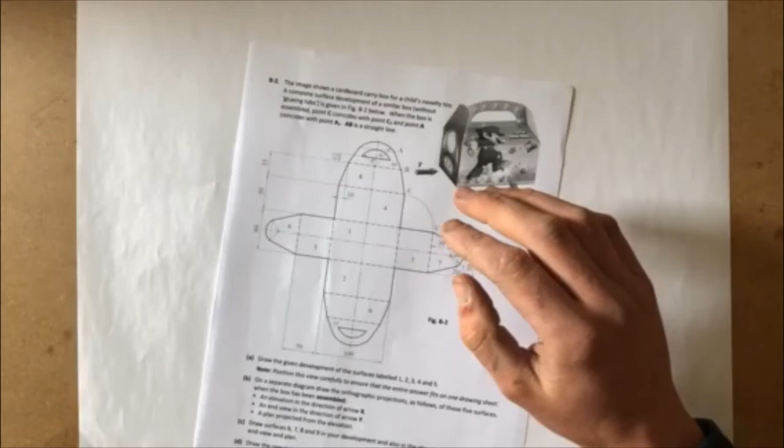So we're going to keep this. We said you'll have a big drawing sheet in the exam. I'm hoping I should be able to fit it onto this A3 sheet here in front of me. We'll see how we go. I'm going to position it over to the left hand side to keep it away, because by looks we have to draw another bit over to the right. So I'm going to keep this point here as close to the left hand side as possible.

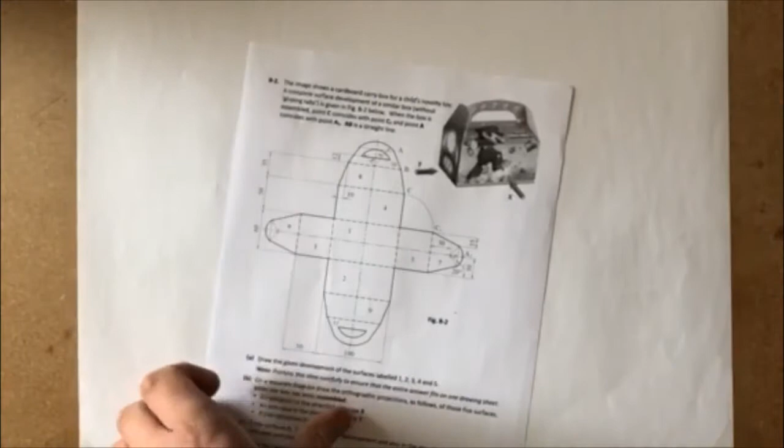Going to start with this corner here. That distance there is 50, so that should be 50. I'm going to leave about 60 mil from the edge of the sheet, maybe 70. Should give me enough space to start.

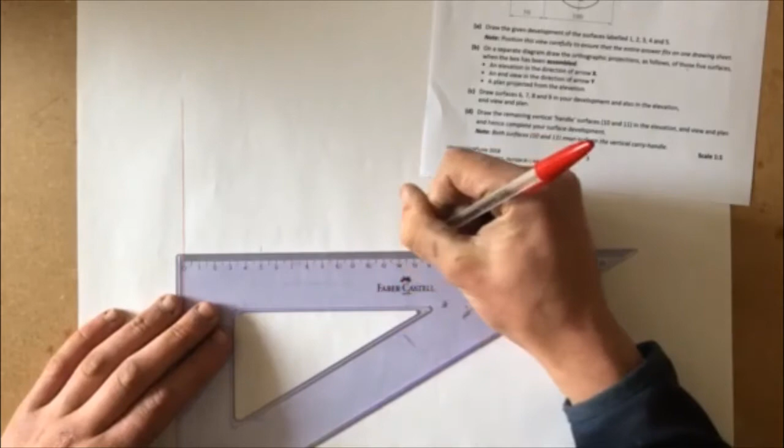Then it's 50, 100, and 50 again. Yes, I might struggle to fit this on now. So in the middle of that there we have a centre line.

And then from the top then we'll try and keep it roughly in the middle, so that's about here, that's the centre over there set.

In the centre I'm going up 30, 50, and 35. And coming down the way then it's 30, 50 and 35.

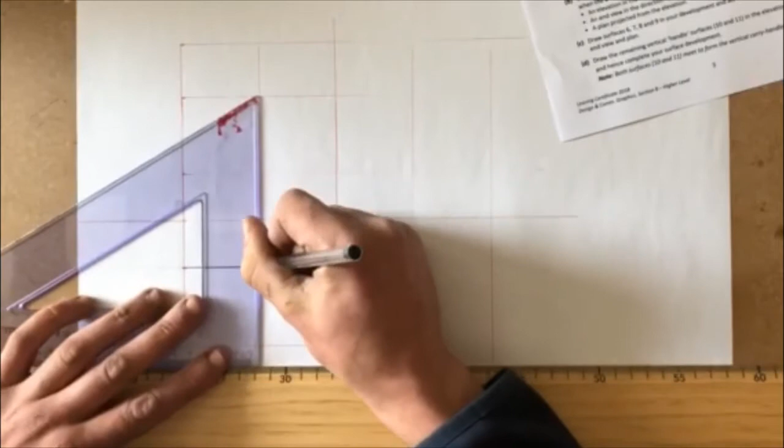So we've got the outline drawn in there now. We'll just go back and heavy in as much of this as we can here. Here's the heavy edge. Look at the heavy edge.

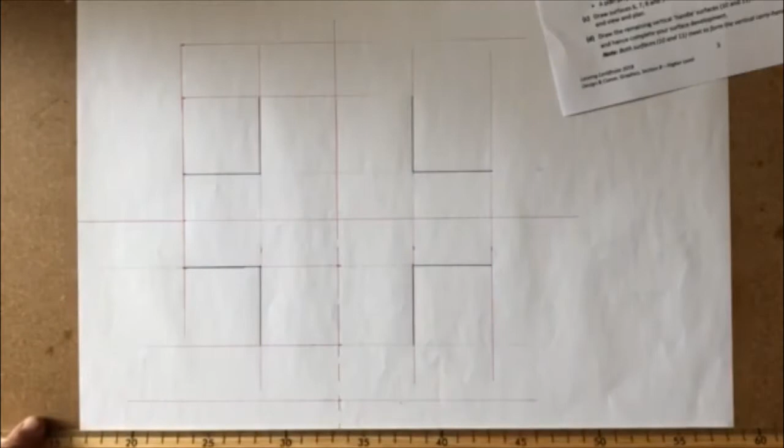Yeah, so that's those edges there then set. We're coming in 10 mil on the edge here to get this 35 line.

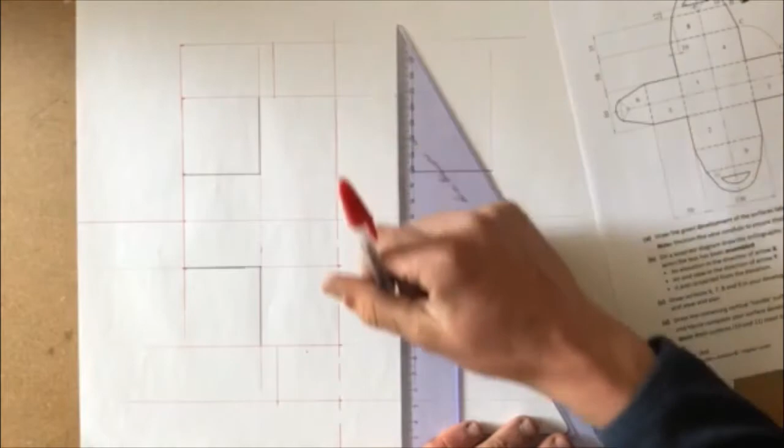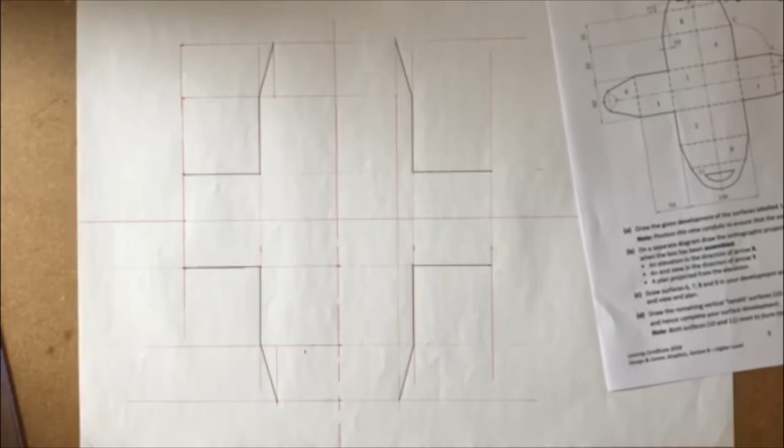Same on the other side. I'll finish this side over here as well. Finish this up. So we see the center is out 30 mil.

Come down 15, up 15. No, just looking at there now, that's a 20-degree angle there. And this one's out 15, so these are actually different.

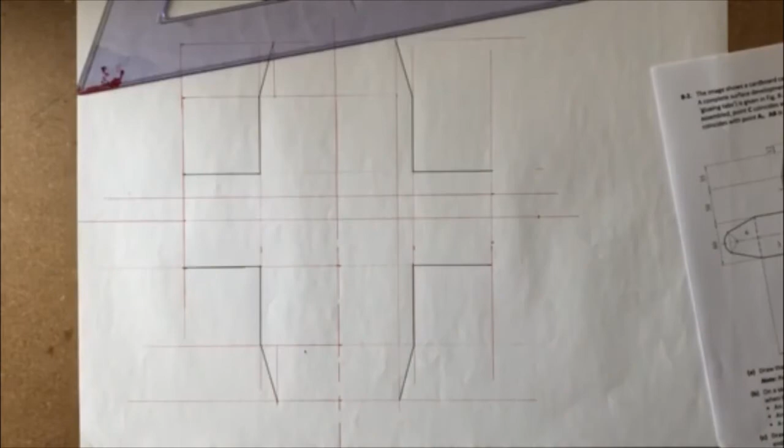So we get caught there very easy now. Where's me protractor? I have a protractor there somewhere.

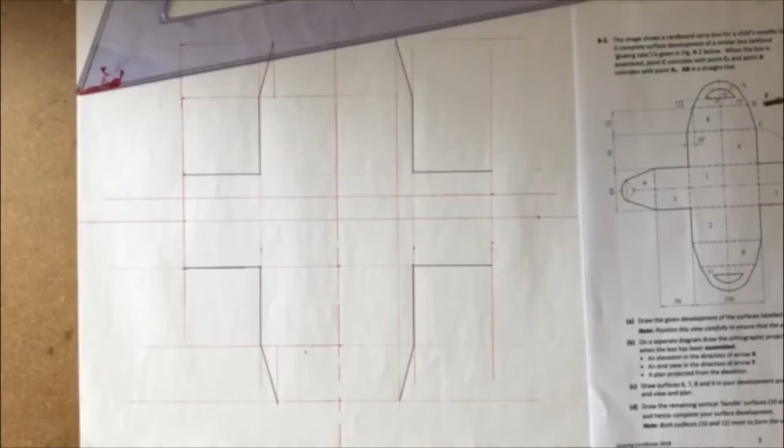Hang on. Don't worry, I'm leaving the protractor now. So I just have to figure it out.

That's 20-degree angle, that's 20-degree angle. That's so symmetrical there. That is 20 as well.

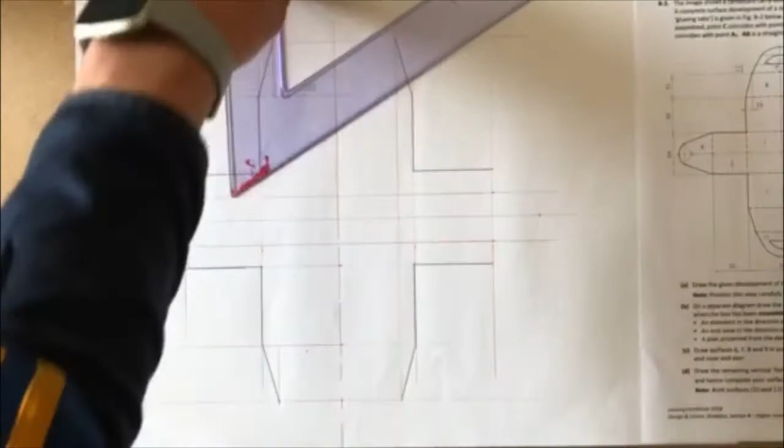Where's this side? Where's that protractor? How do you do it now unless I make it? So I just make it 20 degrees here. We know, because I don't have the protractor. Just end up making it, no, I'd probably make it a bit small then.

And I'll pause this, let's see if I find it. Right, so I'm just looking here now, trying to see what we have here. Trying to draw this surface here.

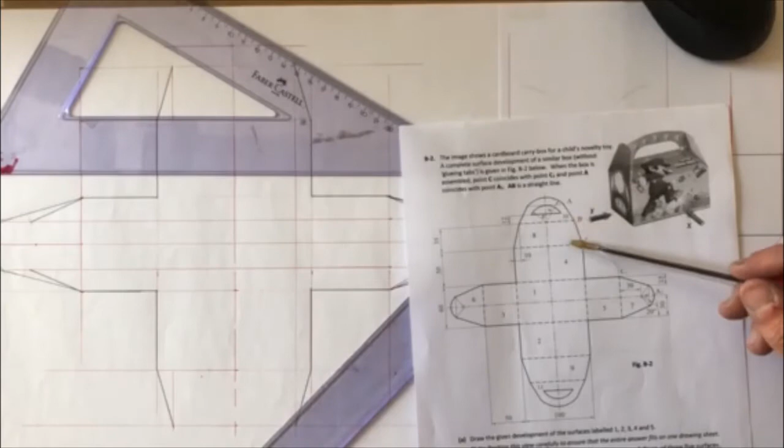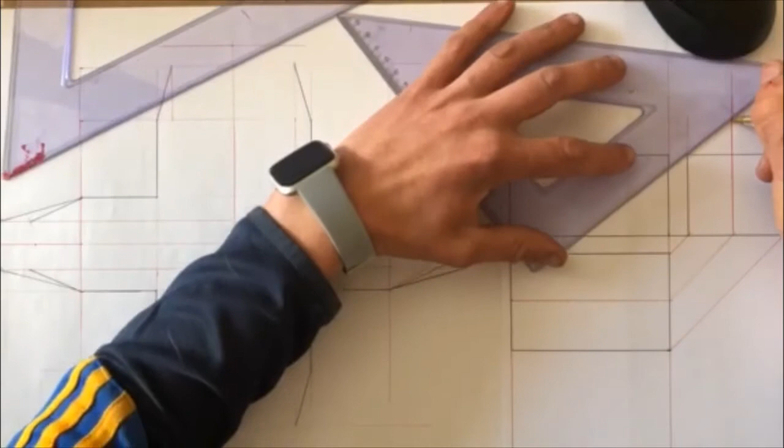So when I'm looking at the end of that, that's going to be folded up and it's going to be folded in onto the centre line. The height's at 35, so it's going to be folded in here somewhere. It's a length 35, so if I swing my compass there, 35, there, 35, yeah, they cross there. Okay, so this will join back there,

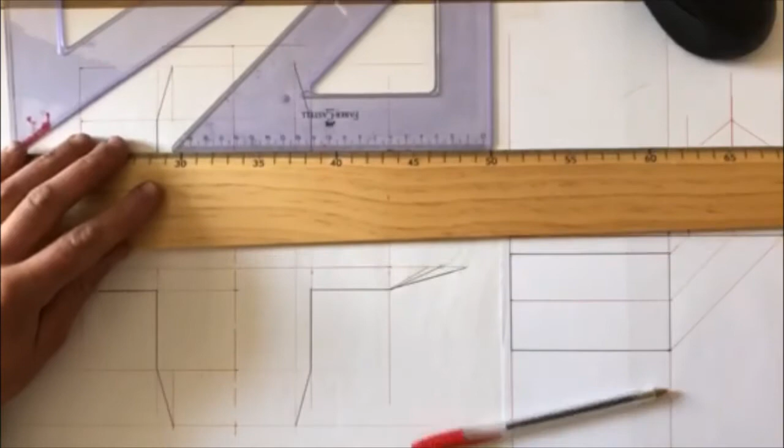And then I need to find that point in plan. So that's falling in plan. Where is that? And that's falling in. Where is E in plan? So it's down here and across.

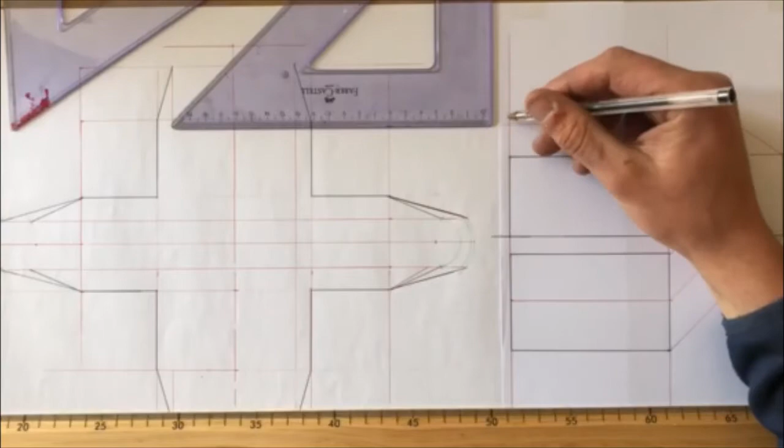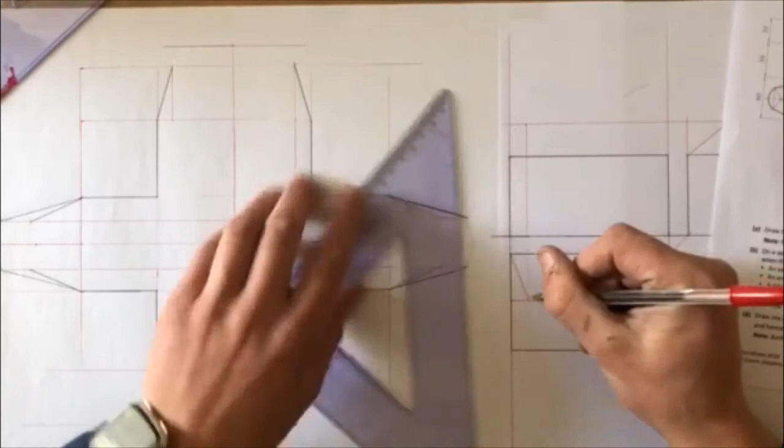It's in 10 mil from the edge, isn't it? It is, because the widths will never change, so it comes in 10 mil from the edge there. So that's that point in plan there. So it's that on that side, it's going to be the same on this side.

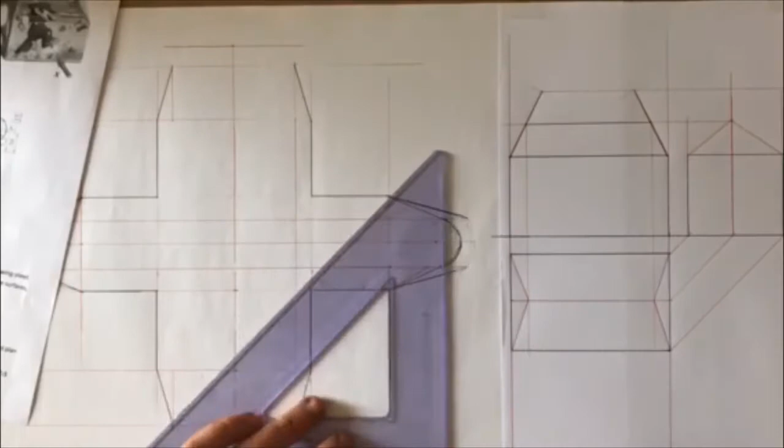Okay, and that's going to come across there then. Now, what we need to do here is just freehand in this curve here. Okay, we need to get some points on that, so I'm going to take just 2 points on it. There and there. And I am going to take the height there up. I'm going to step them off up here. Okay, so that point there and that point there is that height.

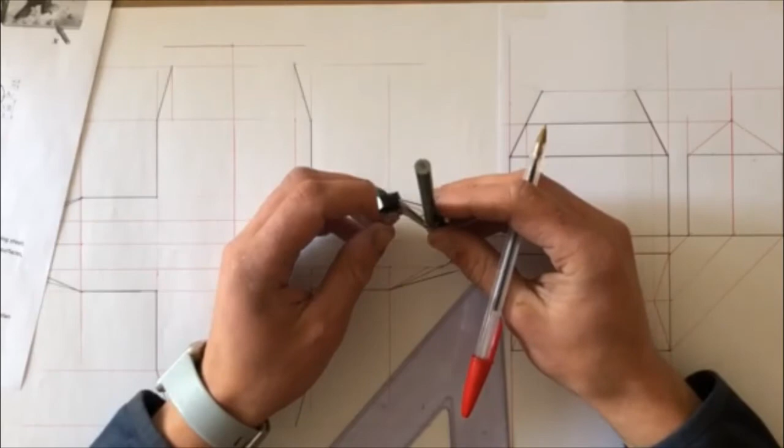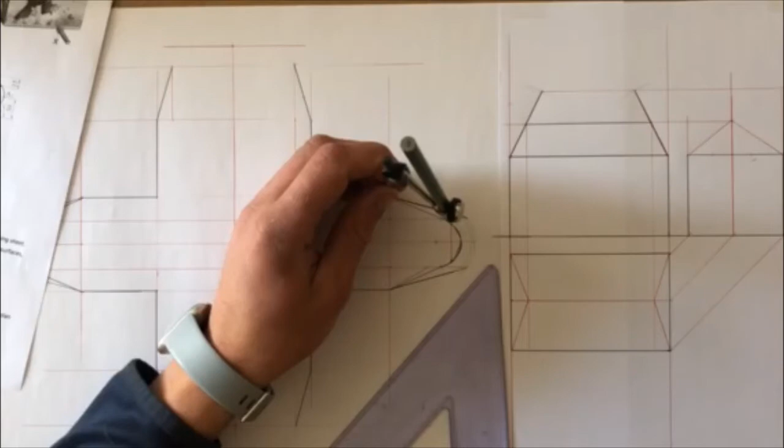I'm going to take the width of them. I'm going to step the width off this way and the width off this way. Sorry, I'm taking the point on... yeah, that's that right there, that distance there is that distance there. Yeah, that's right. So I'm taking that height. Yeah, no, that's perfect. So I'm taking that height there and I'm going to bring it across.

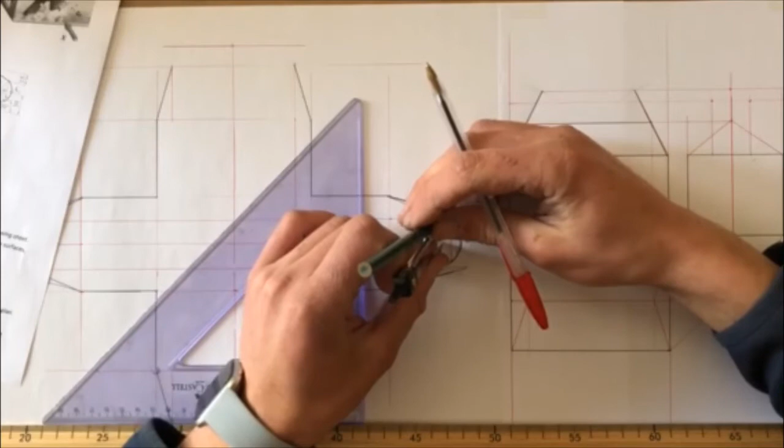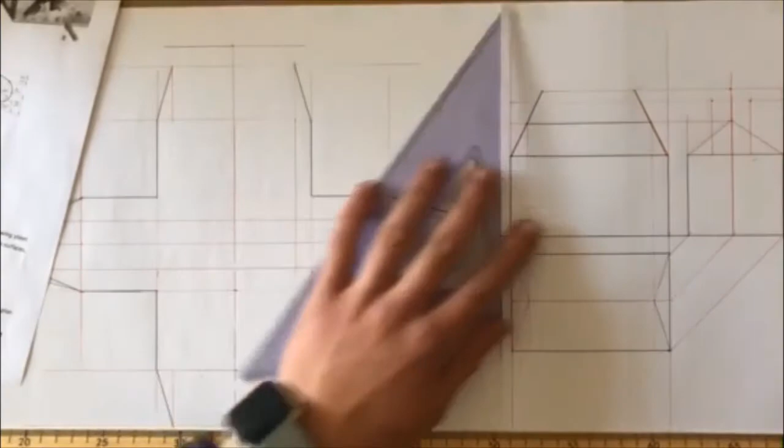I'm going to bring it up there and there. So that's 1 point there, that's 2 points there, that's 3 points on my curve. This is my 4th one, this is my 5th one, which are my widths that I already have. There's that compass gone again. From there to there. Bring these up. Take those heights. That's the wrong height I stepped off there now.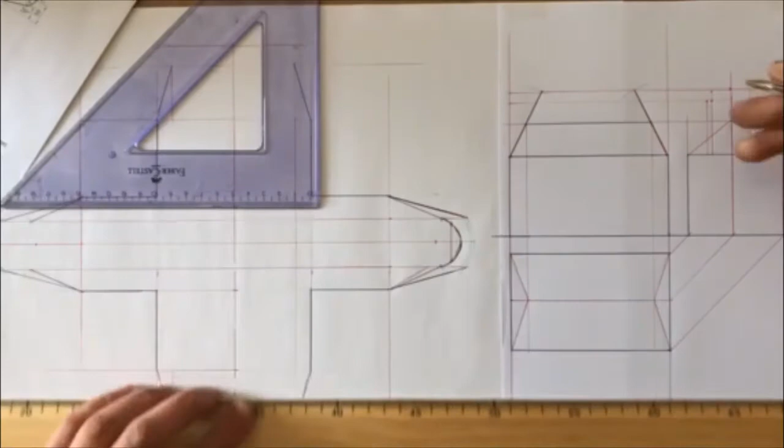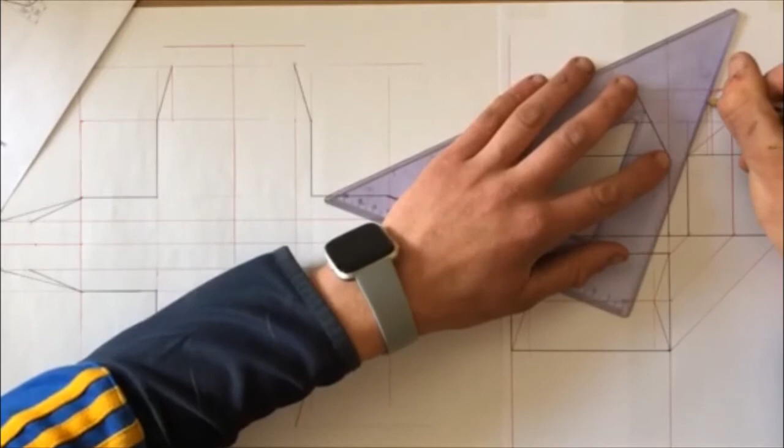That's one there. That's one there. That's one there. And that's one there. And they join those guys curved up there. Create a curve. And come back down to the edge. Heavy that in, pen. Okay, so we're working backwards from what we'd normally do. Normally we divide up this and we bring it down. This time we're dividing it up down here and bringing it up here. Okay, and that's my end view completed then.

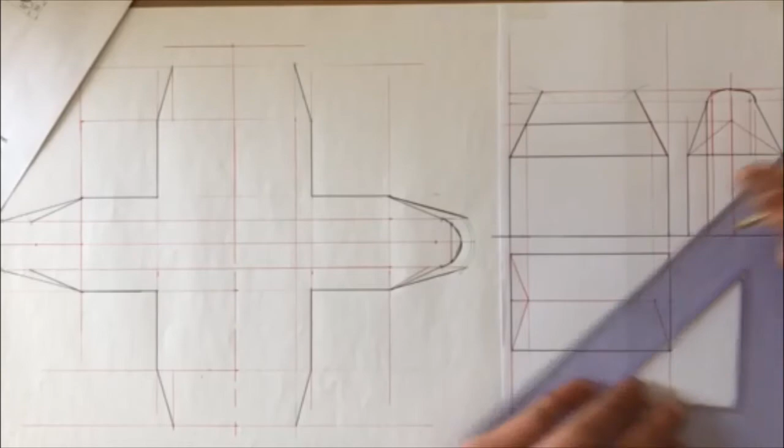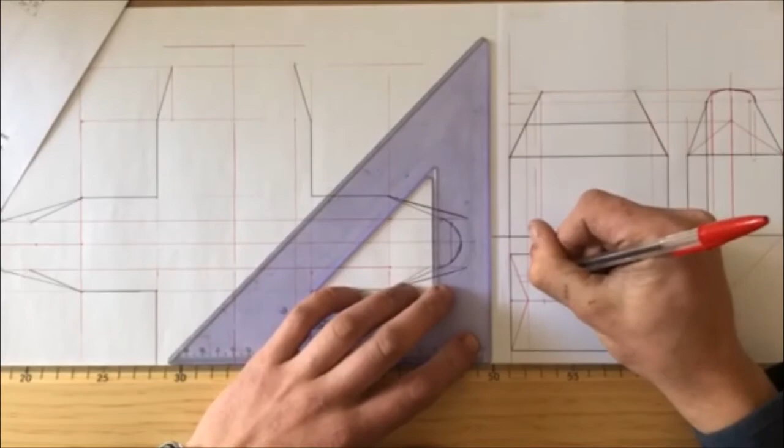We can take those points then again. This one here. Sorry, light pen. This one here, this one here. Bring them down here, here. Bring them in, 1, 2. And drop them down then in elevation here, up here. 1, this in the middle. 2. That's the edge there. That's that one. That's that one. And that goes back down there.

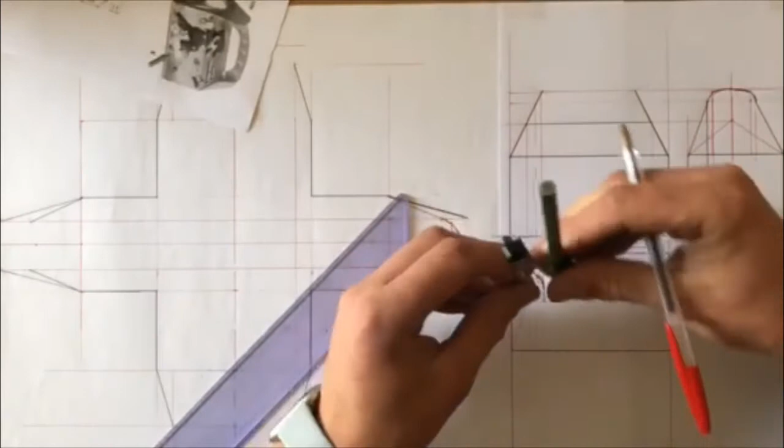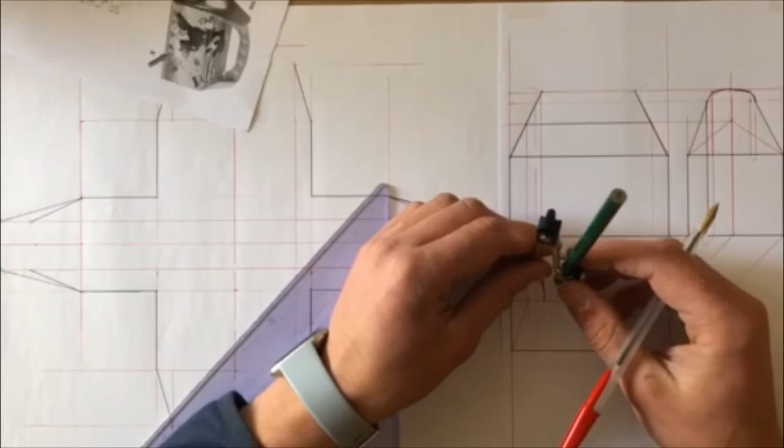Okay, and you can just transfer those distances across then through axial symmetry. This one here across, and this one here across. Down and in there like that. Okay, they're the same on the other side. You can just draw them in on the other side there. I'll do them quickly here.

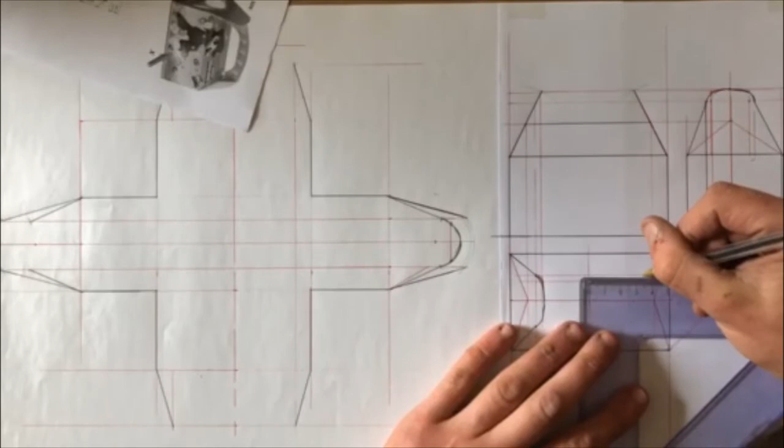So this is 100. Split that there. Split down the middle, 50 easy. Last distance there is 29. 29. There's 27. 27. 34. 34. And that's that for the end view across there then.

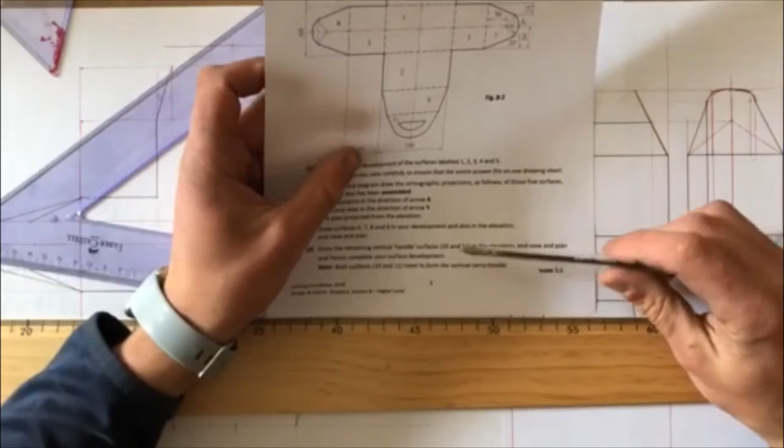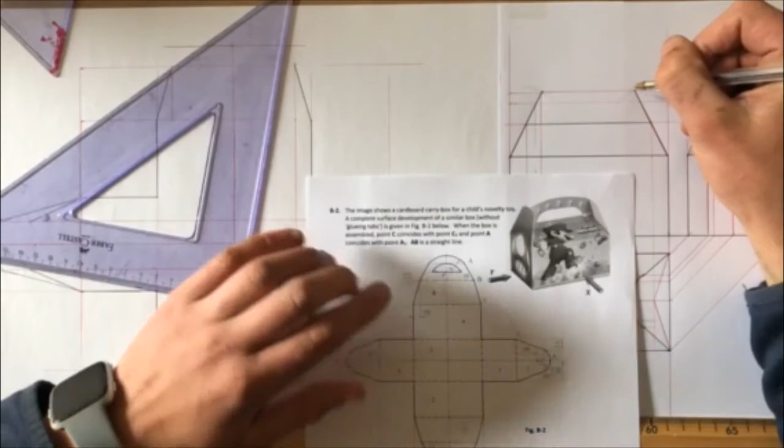Okay, the last bit then in the elevation is this is a flat bit here. The last part here then is draw the remaining vertical surfaces 10 and 11 in elevation, end view and plan, and hence complete the surface development. So basically once we have these heights here now, we have this height here and this height here, we have a curve on top there, so we can split that. So this is my 35 height there.

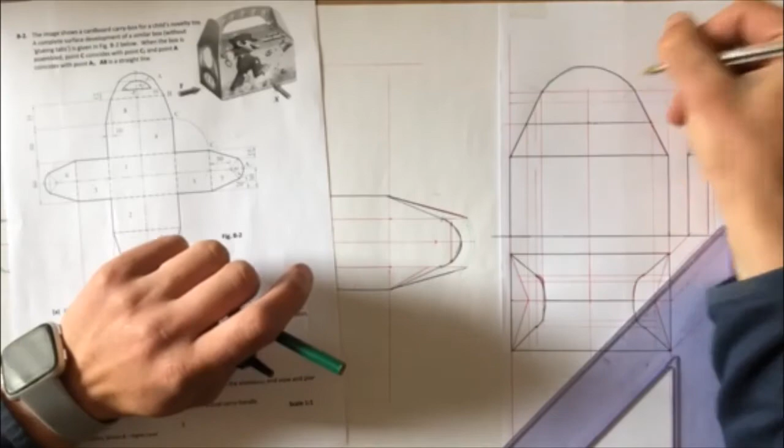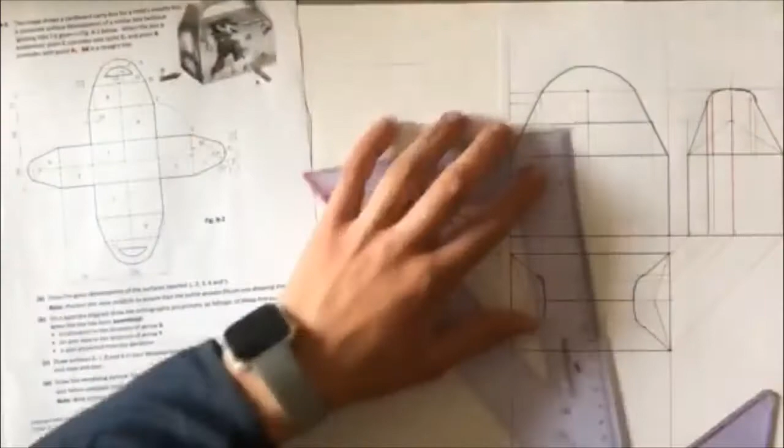So I need a center that runs up to the center of that. I'll bring up the center line from the bottom. Up the center of the bottom there. From there, that gives me my center for this line across the top. Okay, and then that gives me the top point then on my other circle, which is 12 mil up. Just 12 mil up from the base, so if I come up 1, 2, 12 mil there.

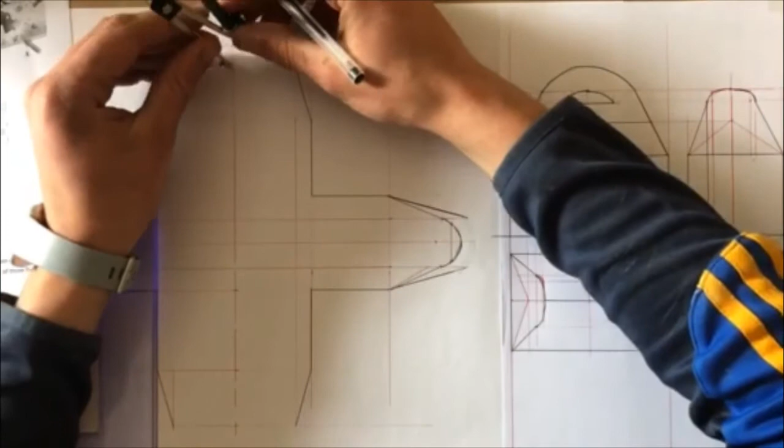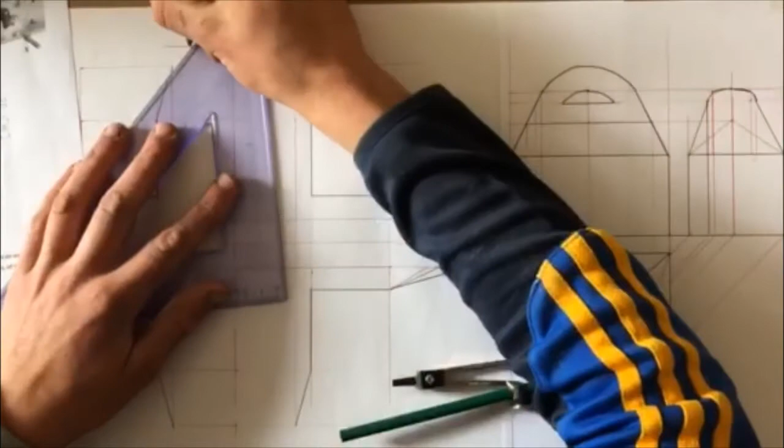Draw a horizontal line. And that's the curve there. That then gives me my radiuses for my curve over this on the far side. And the same here, this radius here. Into me here, and then like that. That's my 12 up. Yeah. And then they just join back to the edge there like that.

Okay, same down the bottom here, and then just fill in your dashed lines here, here, and here, here, and here, here, and here, and then that's that one done. Okay, tricky enough one now that is. There's a bit of time and a bit of visualization in it. So give it a go. If you have any questions, let me know and see how we go.

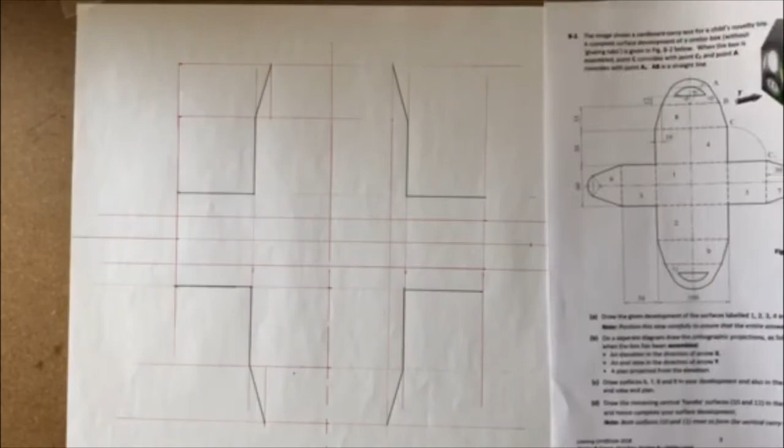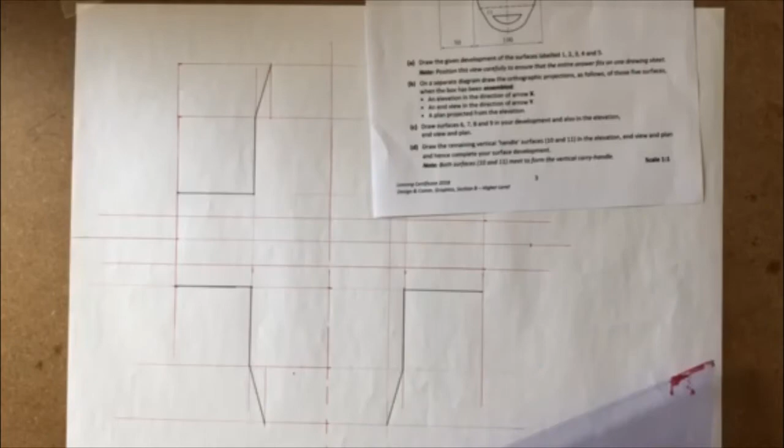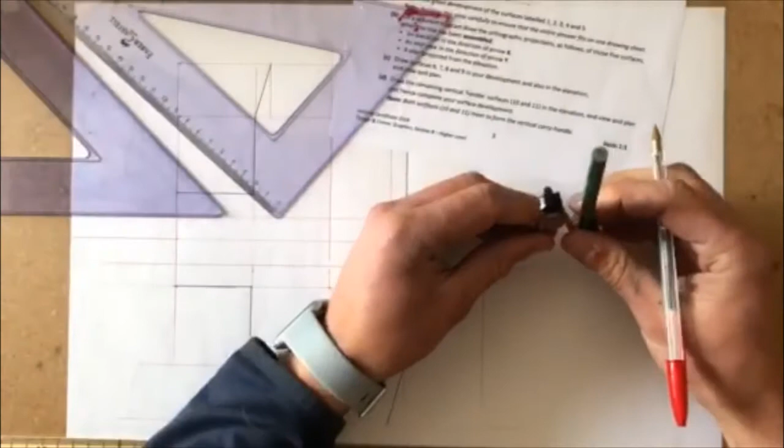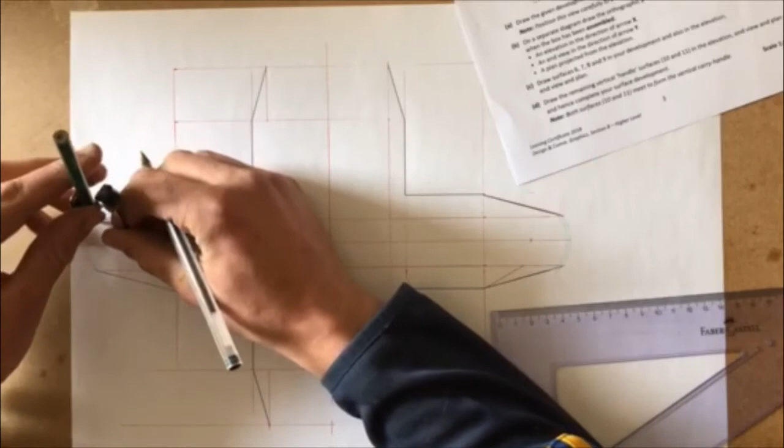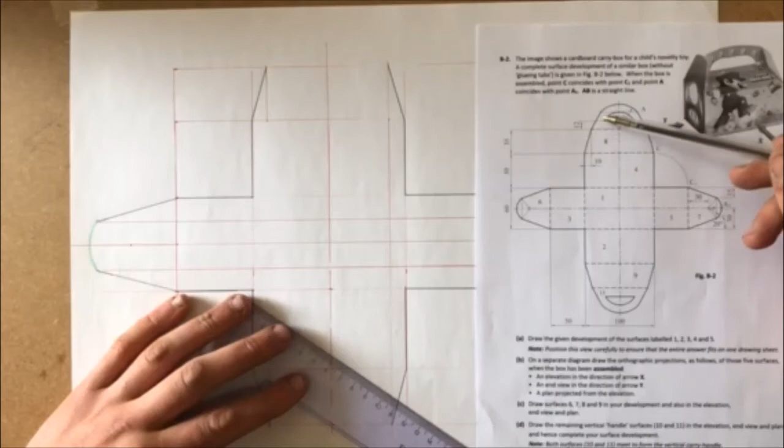Okay, that's that side then done. Here then, the top here, we're going 100 wide, yeah. That's up to the edge now, we need to do this bit up the top here. It's up 12 mil anyway. Up 12 mil.

Radius of one gives us the radius of the other one. Now they have R, and R. I wonder, are they all the same? No, they're not. Look, I need to draw 1, 2, 3, 4, and 5 to start with.

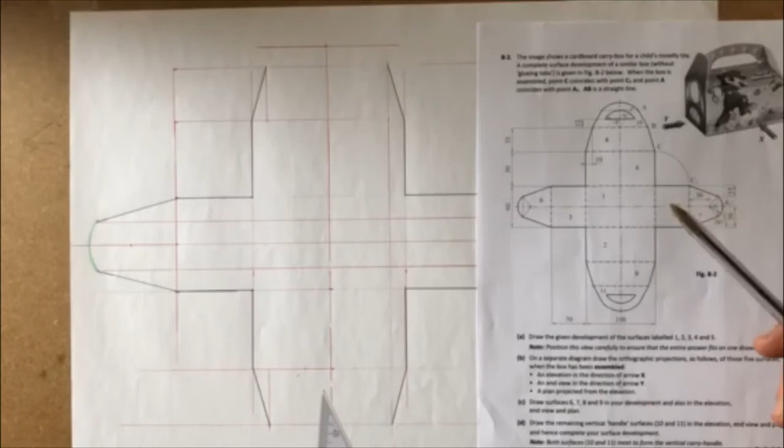On a separate diagram, draw the orthographic projections as follows of those 5 surfaces when the box has been assembled: an elevation in direction of arrow X, an end view in direction of arrow Y, and a plan projected from the elevation. Okay, so we don't need any more of that for a minute. Draw surfaces 6, 7, 8, and 9 in the development, and also in the elevation, end view, and plan.

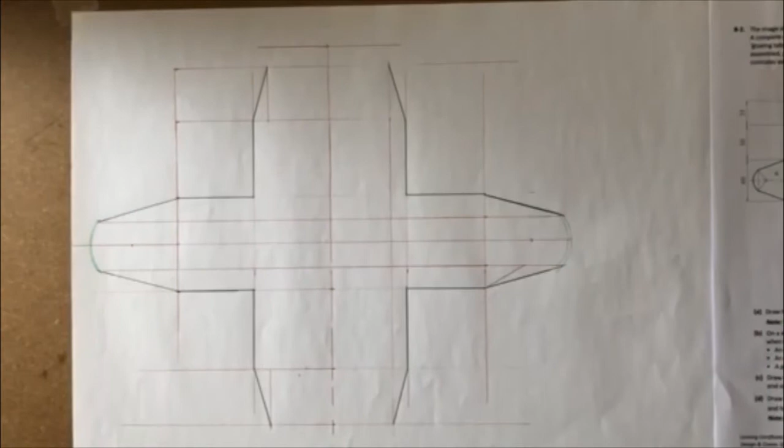Right, we're kind of doing 2 questions that coincide here now with each other, so I'm going to try stick down another. So you would have one of the big sheets, so I'll stick down another sheet out here to the side. Move this across here. And we will stick down another sheet out here, and we can draw away into this.

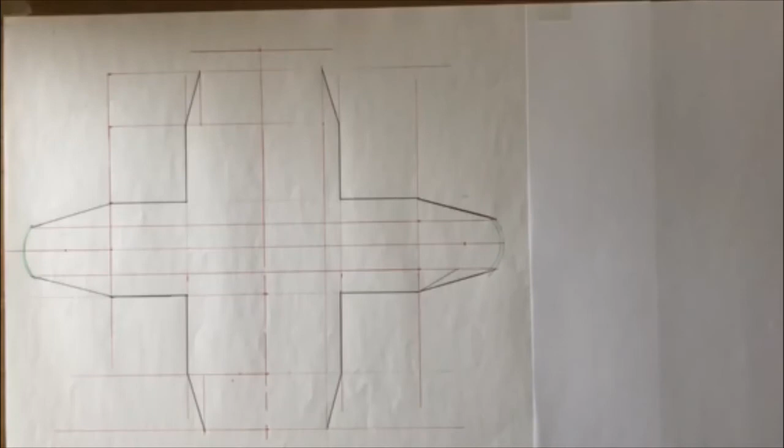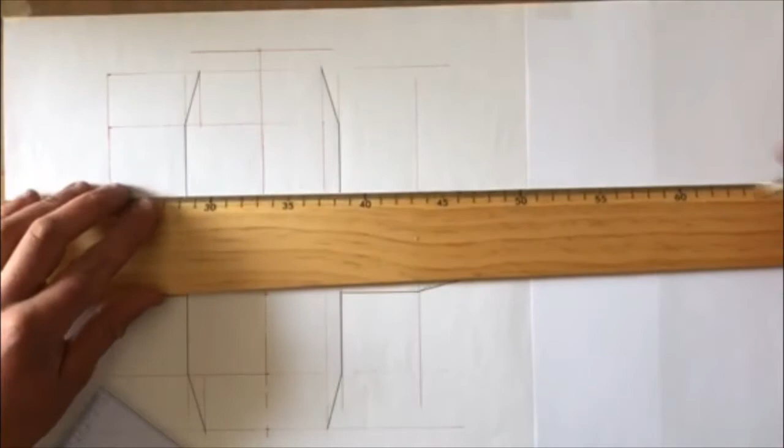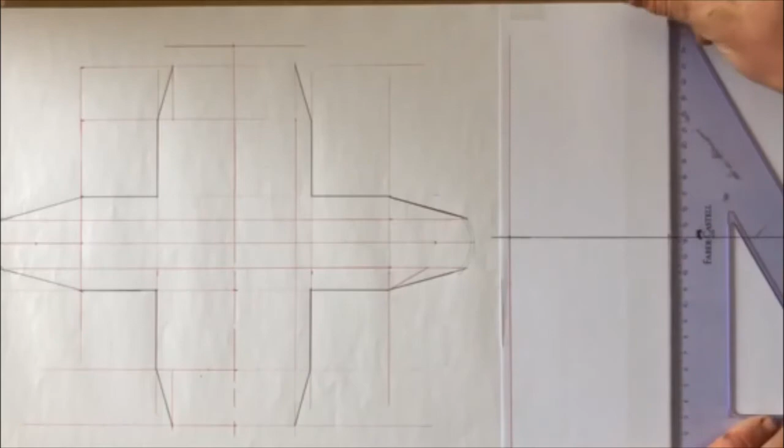Okay, so that's an elevation, plan, then view out the side here. So we'll go out here and we'll set up an XY line. Hopefully we have enough room now. Direction looking in arrow X, so it's looking in the front way, so it's 100 mil. I'm going to keep it real close to this now, to be honest. Yeah, it should fit. Elevation and plan. 50 mil height for the side.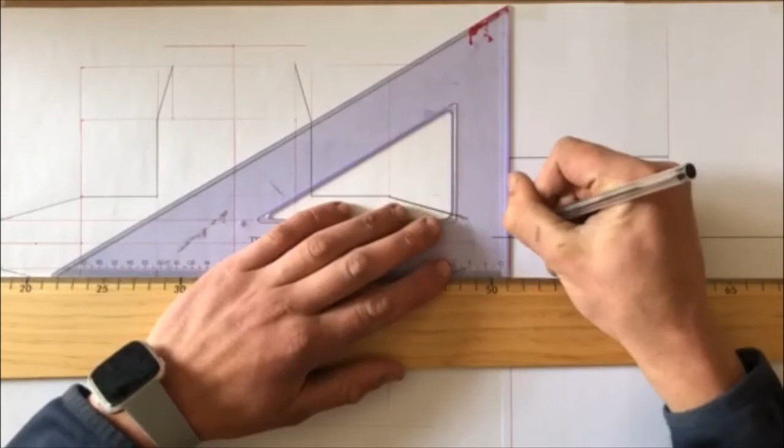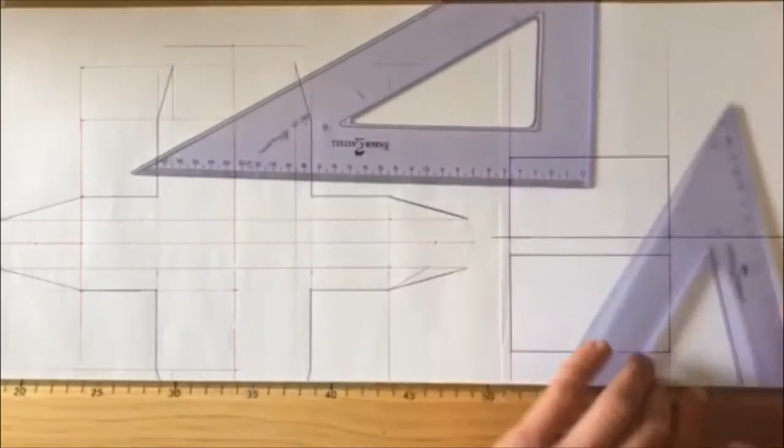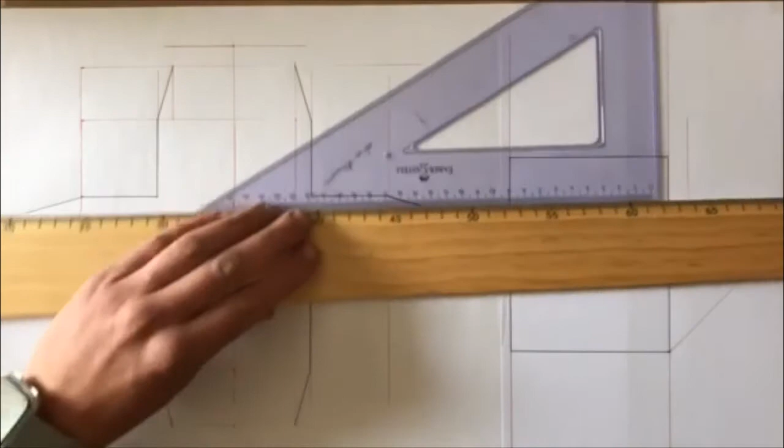We have a small gap between the plan, and then my plan is looking down on a box that's going to be 60 wide. All these edges are flat edges. And up then to our end view. Lovely. So that was just 1, 2, 3, 4, and 5. Separate diagram, orthographic projections, elevation X, end view Y, and plan projected. Perfect. Draw 6, 7, 8, and 9 in your development, and also in the elevation, end view, and plan.

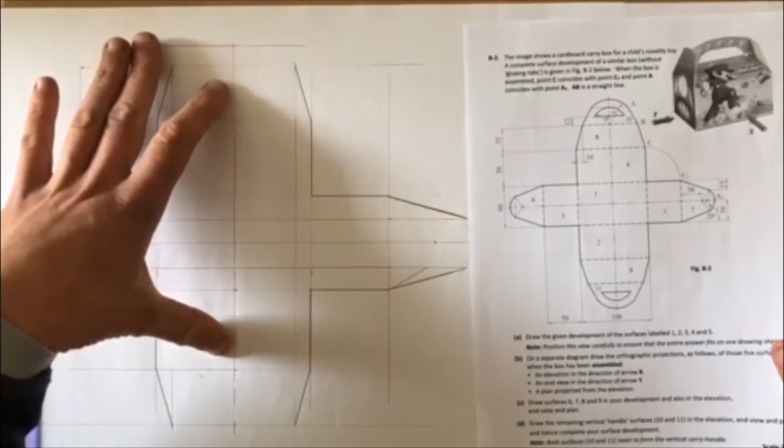So 6 and 7 are done. 8 and 9 are done. Yeah, that's 8 and 9 there. Okay, so they're done in the development, and we need to draw them in now over in our elevation, or in our plan view, sorry. So I'm looking in here as an end view, so I'm going to see this as an end view here. Now where will I see the curve? They fold in, so am I going to see the curve in plan, or in elevation, or in end view?

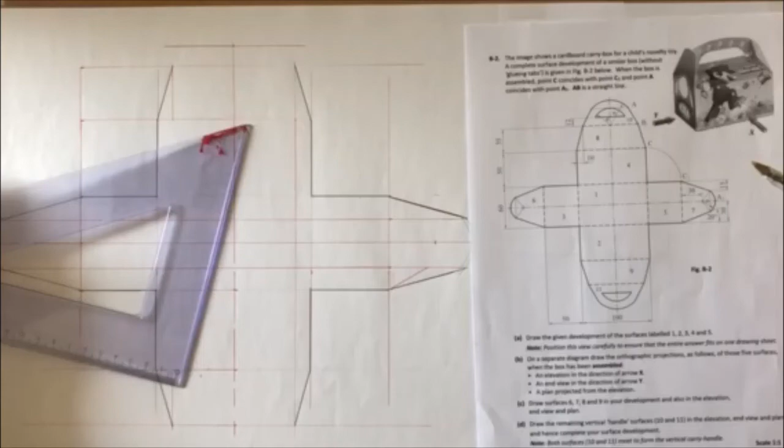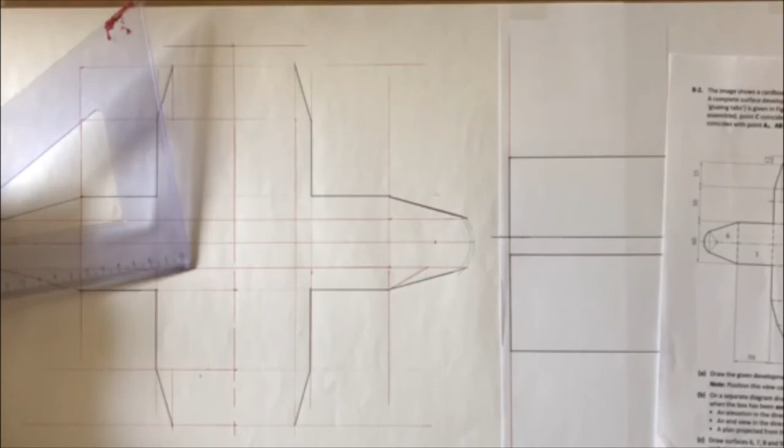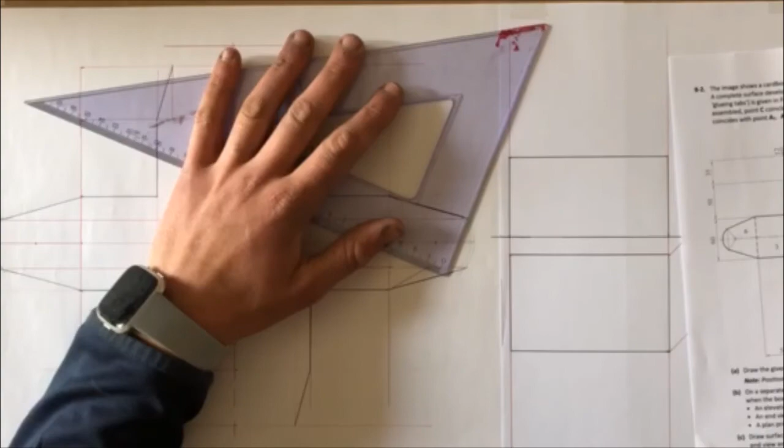Just trying to think here now. Right, I'm doing 6, 7, 8, and 9. So this folds up, and we've got this side coming in at an angle. So this edge and this edge line up to each other. They might if we had drawn fully correctly, but they don't in this anyway because this extends up past it.

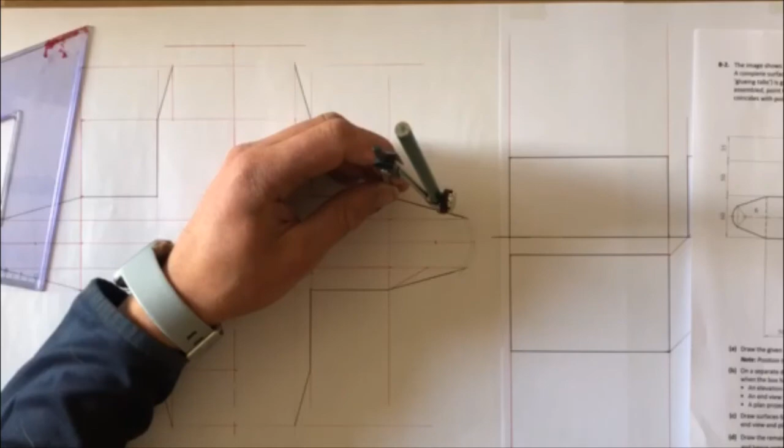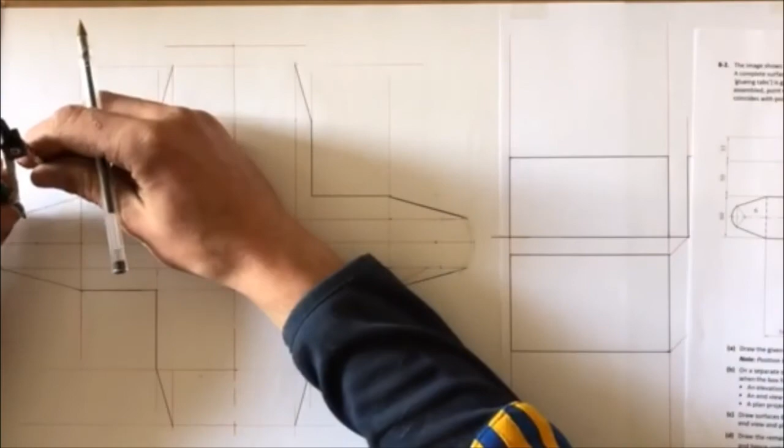So yeah, this guy and this guy are actually the same length, so I could probably give me a better angle to have them at 20 degrees. So if I take them there and step them down there, step it down there, step it down there, that'll just give me the right angle, because I haven't got the protractor.

So great to have all your equipment. I have a protractor there, I just don't know where it's gone. I can't find it under everything.

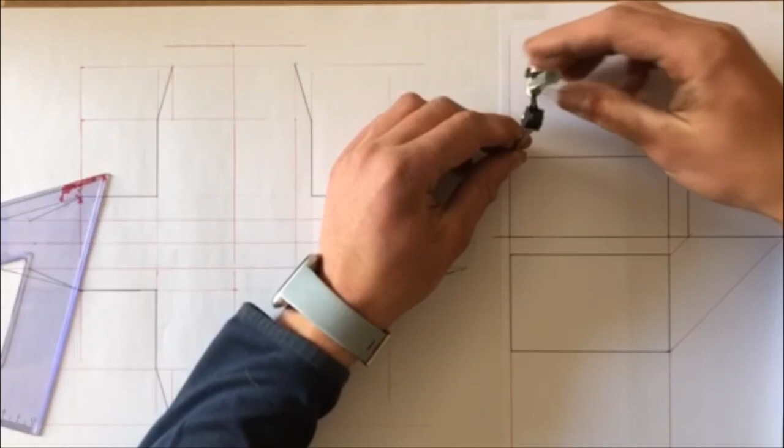So we're taking the full length of that distance there, and it's going to swing up here. So it's coming up here like this. Okay, because that side there is going to flip in there, and it's going to fall in there as well. Okay. That's the two sides there then, and obviously that's the center line up the middle of this.

Okay, so there's going to be a true line up there, that's going to be folded away, so we won't see it there. And down in plan here then, we're going to have a curve here as well.